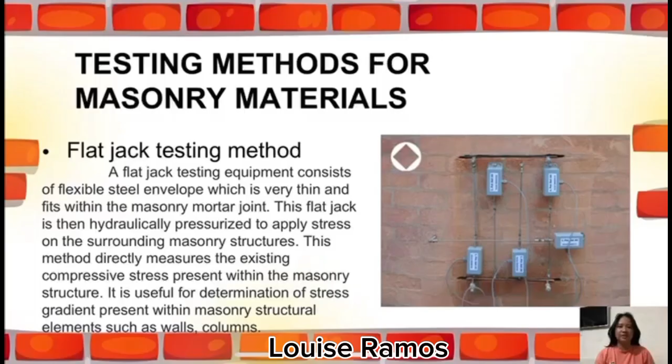This method directly measures the existing compressive stress present within the masonry structure. It is useful for determination of stress gradient present within masonry structural elements such as walls and columns.

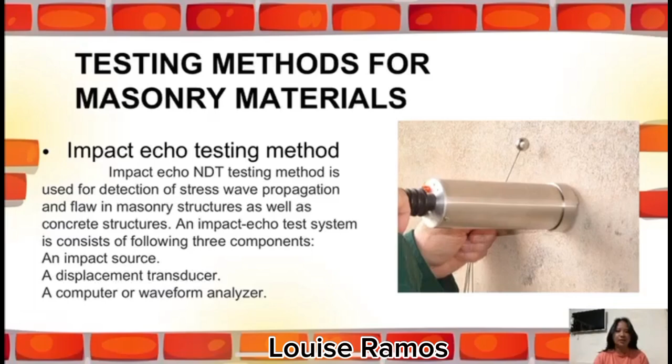The second testing method is the impact echo testing method. In this method, you will tap a steel ball that will generate stress waves that travel through the masonry material. It can be used to accurately measure the thickness of masonry walls and to locate internal defects such as cracks, voids, and honeycombing.

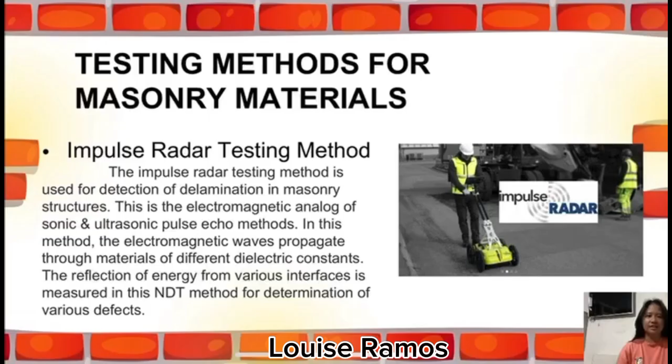The next method is the impulse radar testing method. It uses electromagnetic waves to assess masonry structures by identifying voids, cracks, wall thickness, structural composition, and moisture content.

The next testing method for masonry materials is infrared thermography. This non-destructive test is conducted to determine subsurface delamination in masonry structures. This test is also used to detect internal voids and cracks in masonry structures. The infrared thermographic method gives a fairly accurate picture of the condition of masonry elements inside and can be effectively applied for larger surfaces.

Infrared thermography is a way to check for problems inside brick or stone walls without having to break them open. It uses a special camera that sees heat, because damaged areas like cracks or hollow spots have a different temperature than the rest of the wall. The camera can create a picture showing where these problems are. This is helpful for checking large areas quickly and getting a good idea of the wall condition.

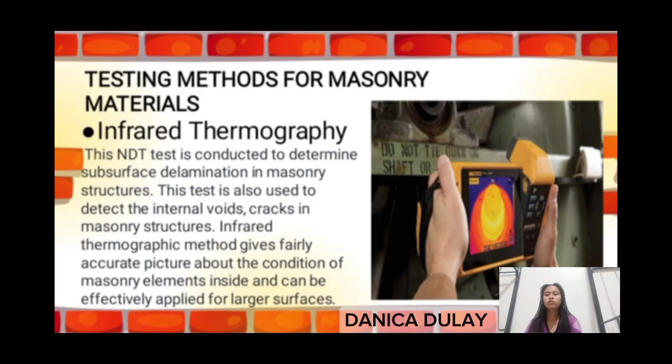Next, the borescope method for masonry structures. The borescope method is commonly used for concrete and masonry structures and also for steel structural elements. A borescope is used to look inside inaccessible or small voids. The borescope can be used to gain information on the depth of the outer layer of bricks or natural stones, and it can provide information on the filling materials in between the arches. It may also be used to examine the mortar between bricks or natural stone.

So, a borescope is like a tiny camera on a flexible tube. It's used to look inside hard-to-reach places in buildings, like the spaces between bricks or inside arches. This helps inspectors see how deep the bricks or stones are, what's filling the gaps, and how well the mortar, the glue holding the bricks together, is doing. So, ganun po ka-helpful ang borescope sa masonry.

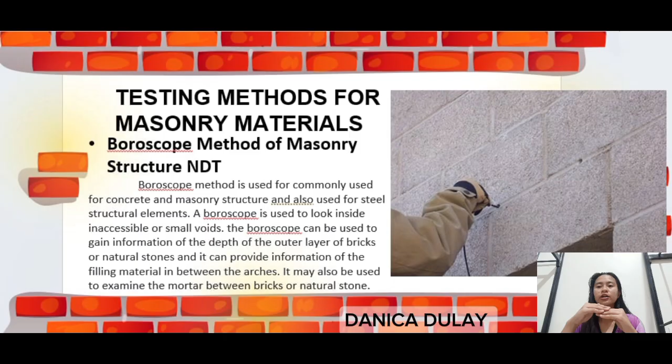Hello, I'm Marc Ian Locquiao and I will be discussing quality control in masonry construction. So, quality control refers to the systematic process of ensuring that all aspects of masonry work meet predefined standards, specifications, and guidelines.

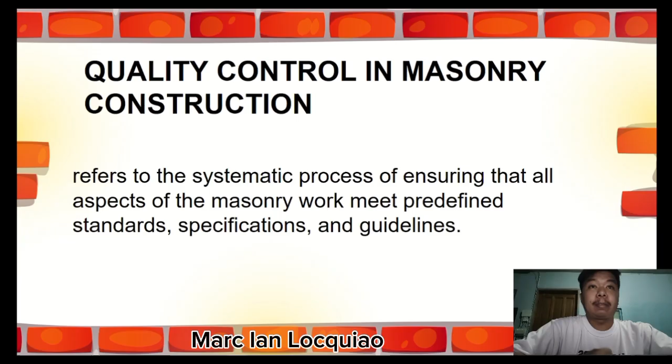Meron tayong 8: material selection and inspection, adherence to standards, proper mortar mix and application, inspection of workmanship, ensuring structural integrity, quality control of joints and movements, curing and protection, and lastly, documentation and testing.

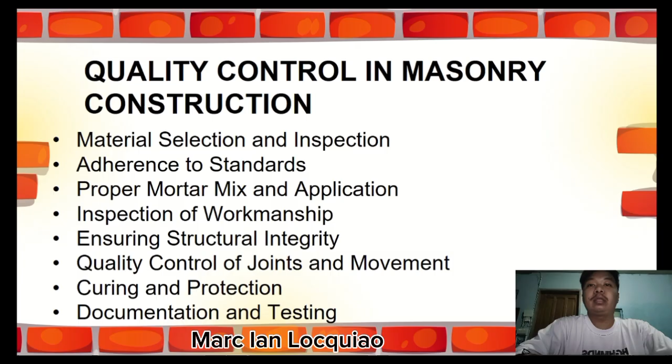So let's start with material selection and inspection: ensuring that all materials such as bricks, blocks, mortar, and reinforcements meet quality standards. This includes testing materials for strength, consistency, and stability for the intended purpose. Adherence to standards: following established standards such as those set by ASTM, or the American Society for Testing and Materials, to ensure that materials and construction practices are in line with industry requirements.

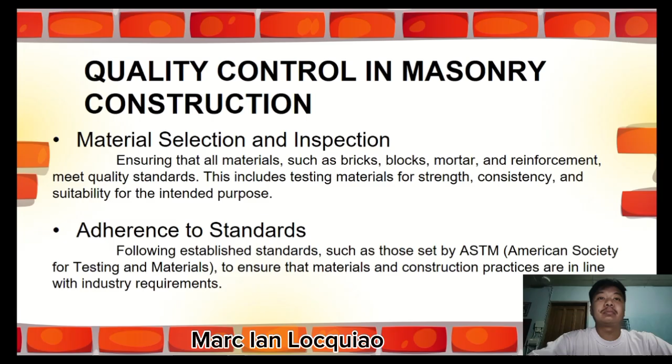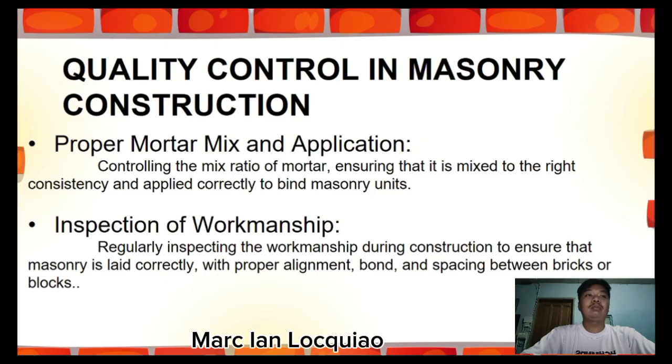Next, proper mortar mix and application. Controlling the mix ratio of mortar, ensuring that it's mixed to the right consistency and applied correctly to bind the masonry units. Inspection of workmanship. Regularly inspecting the workmanship during construction to ensure that masonry is laid correctly, with proper alignment, bond, and spacing between bricks or blocks.

Next, ensuring structural integrity. Monitoring the installation of reinforcements such as steel bars or mesh to ensure the structural stability of the masonry work, especially in load-bearing walls or areas subject to stress. Quality control of joints and movements. Ensuring that joints are properly spaced and filled, and addressing issues related to expansion or contraction of materials, which can impact the structural performance of the building.

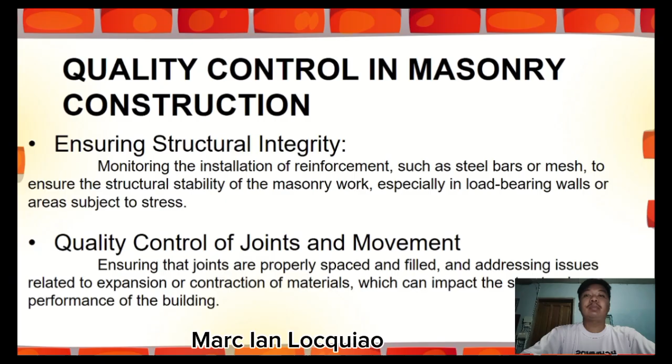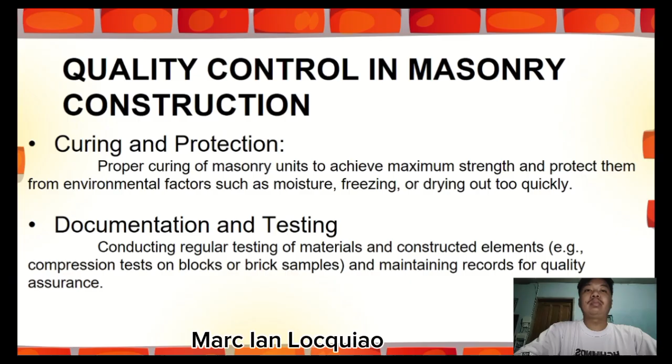Next, curing and protection. Proper curing of masonry units to achieve maximum strength and protect them from environmental factors such as moisture, freezing, or drying out too quickly. And lastly, documentation and testing. Conducting regular testing of materials and construction elements such as compression tests on blocks or brick samples, and maintaining records for quality assurance.

So good day everyone. My name is Carlo Yap from Group 1 and I'm here with you today to discuss what is masonry in structural applications and sustainability in masonry.

So first things first, what is masonry? Masonry is a construction technique that involves stacking building materials like brick, stone, or concrete to create structures or walls.

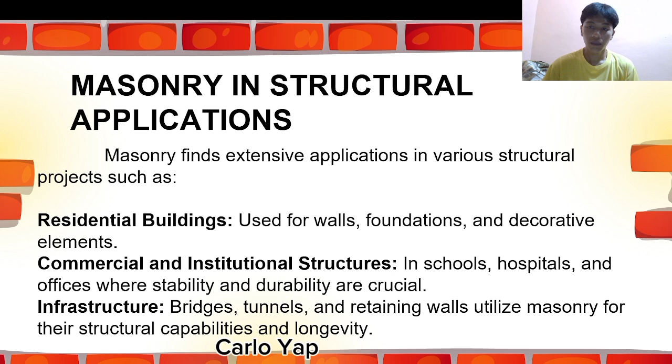Masonry is a sustainable building material. It is recyclable, energy efficient, and can withstand weather extremes. Masonry provides energy efficiency, long life cycle, lower life cycle costs, and resilience following natural and man-made disasters. Masonry is a restorative material with a low impact on the environment. Existing masonry structures can be improved to minimize carbon emissions from buildings.

So, in this section we're discussing the environmental benefits of masonry. So, first, number one is recyclable. Masonry materials like bricks and concrete can be crushed and reused as aggregate in new construction or road base.

Ito yung sinasabi ni Ma'am noon na pwede tayong gumamit ulit, pwede nating i-recycle yung mga nagamit na concretes. Example nito is yung mga na-demolish na mga structural buildings na yung concrete doon ay pwede nating i-process ulit at i-use as a component in new concrete mixes or as a base material for road construction projects. So, to put it simply, yung reused na concrete ay pwede nating gamiting aggregates ulit.

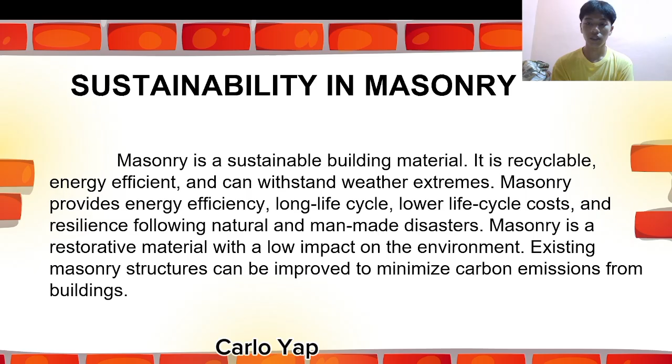So last is existing masonry structures can be improved to minimize carbon emission. Retrofitting older masonry buildings with insulation or energy efficient windows can improve their performance. So example is older concrete buildings in the Philippines could be retrofitted with insulation on the exterior walls or with reflective coatings to reduce heat absorption and lower cooling costs. So, yun lang po ang report ko.

Thank you. So, here are the advantages and disadvantages. The advantages include durability and longevity, fire resistance, thermal mass, low maintenance, aesthetic versatility, sound insulation, and moisture resistance. The disadvantages include high initial cost, labor intensity, weight and foundation requirements, moisture absorption, susceptibility to cracking, and limited flexibility.

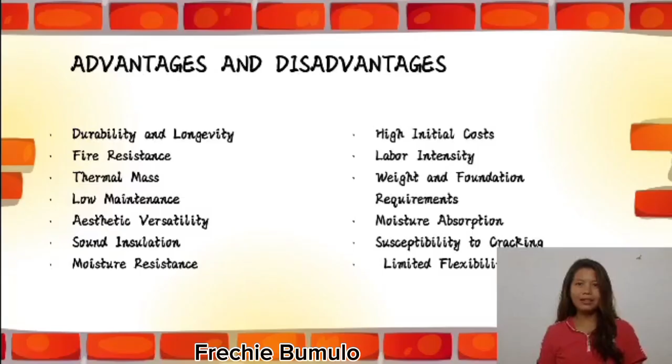First advantage is durability and longevity. One of the biggest advantages of masonry is its exceptional durability. Masonry materials are incredibly resistant to environmental damage. Brick and stone structures can withstand extreme weather conditions including high winds, heavy rain, and fluctuating temperatures without deteriorating.

Also, it has a longer lifespan than many other materials. Well-maintained masonry buildings can last for centuries. This makes masonry an excellent investment for those looking for a long-term, low-maintenance solution.

Second is fire resistance. Masonry is inherently fire resistant, making it a safer choice for homes and commercial buildings. Brick and stone do not burn or contribute to the spread of fire. This added layer of protection can help prevent extensive damage in the event of a fire and may even lower insurance costs. Isang example dito ay ang firewall.

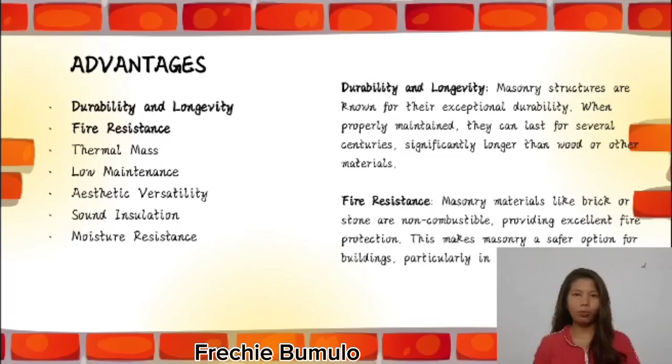A firewall is a fire-resistant wall designed to prevent the spread of fire within a building, allowing occupants time to evacuate and preventing structural collapse.

The third is thermal mass. Masonry materials offer superior thermal mass, meaning they absorb, store, and gradually release heat. This helps regulate indoor temperatures, keeping buildings cooler in summer and warmer in winter. As a result, masonry structures require less energy for heating and cooling, leading to lower utility bills and increased energy efficiency. Masonry creates a more stable indoor environment.

So advantage number 4 is low maintenance. Masonry structures require significantly less maintenance, only occasional cleaning and repointing of mortar joints to maintain its appearance and structural integrity. Though masonry construction can have a higher initial cost, its longevity and low maintenance requirements make it a cost-effective choice in the long run. Homeowners save money on repairs, replacements, and energy costs over the lifespan of the building, making masonry a smart financial investment.

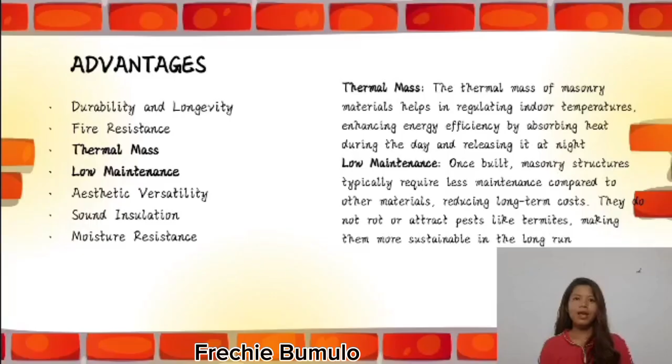Number 5 is aesthetic versatility. Brick, stone, and concrete masonry offer timeless beauty and design flexibility. Masonry maintains its classic appeal for generations. Whether used for traditional homes, modern commercial buildings, or historic restorations, masonry can be tailored to suit various architectural styles. Masonry also comes in a wide range of colors, textures, and finishes, allowing for customization that enhances a building's curb appeal. Masonry's natural beauty remains intact with minimal upkeep.

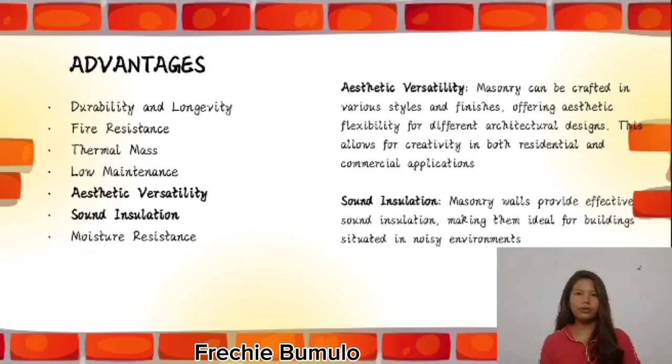Number 6 is sound insulation. Masonry provides excellent sound insulation compared to wood or metal structures. The density of brick and stone absorbs sound waves, reducing noise transmission from outside sources such as traffic, construction, or loud neighbors. This makes masonry ideal for urban environments, multi-family residences, and commercial buildings where noise control is important.

Lastly, moisture resistance. The dense and watertight nature of masonry materials safeguards structures and ensures long-lasting durability. Although relative humidity can influence moisture levels to some extent, the acceptable moisture levels in masonry vary. But generally, a moisture content below 20% is considered safe for indoor brick walls. For exposed brickwork and concrete, 5% is a standard moisture content. Internal brickwork and concrete typically have lower acceptable levels, 1% and 3% respectively. This is according to CIBSE Guide A, Environmental Design.

Masonry excels in resisting moisture, preventing issues like mold and decay. This moisture resistance reduces the need for extensive maintenance and repairs, providing peace of mind.